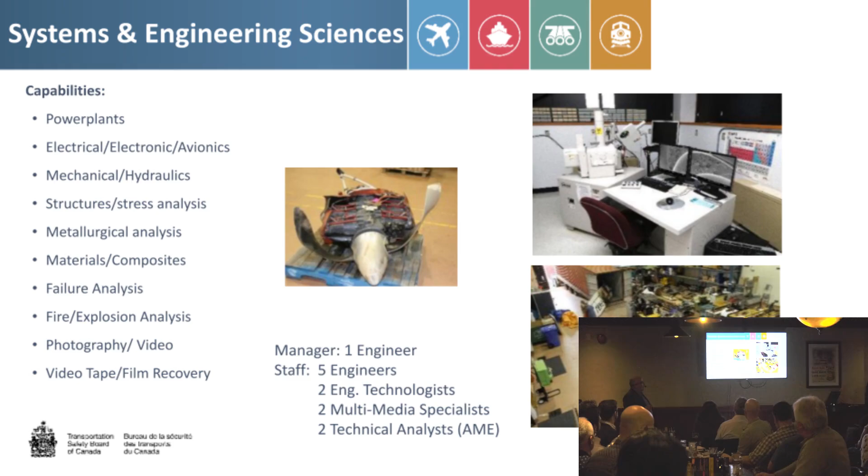Here's the Gucci engineering stuff. There's our lab, this is all you do. I'm not going to read the slide, but a whole bunch of smart folks there - about 6 engineers, 2 techs, media specialists, and a few AMEs. And they're the ones that really help us figure out kind of how stuff broke.

We also have recorders and vehicle performance. And again, remember, we're multimodal - some of our guys may have an aerospace or engineering degree, but they could be working a marine or rail occurrence as well. Matter of fact, our two strongest guys are both hardcore aeronautical engineers, and they ended up working on TSB's contribution to Titan, the submersible that imploded. They can help us, they really take the flight data that we have.

For example, this Mitsubishi was the Ile de la Madeleine crash with politician Monsieur Lapierre - I should know that, I was there. They were able to do a flight video of the occurrence. We had a lightboard recorder, wasn't crash worthy, but it survived. Gave us 2 hours of cockpit communication, so I knew exactly what was going on. We meshed it up with this, and it gave us an immediate understanding of what happened for that occurrence. So good work from those guys there.

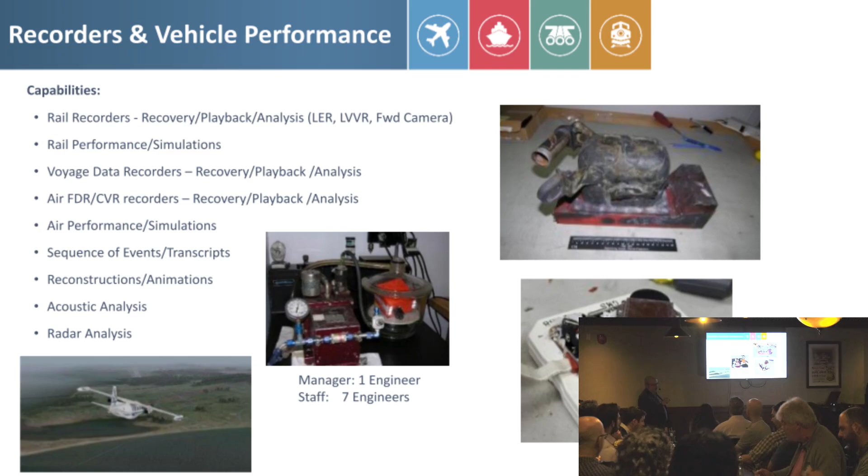So that's about the TSB. When Duff asked me - so there's a little disclaimer on the front slide that says I'm looking at 4 years of accident investigation - Duff asked me to see what can we do vertical-lift wise. So I said, okay, you want helicopter accidents? I can't really talk about accidents or investigations that are in progress, so if something happened in the last year or two, can't really talk, those investigations are still going. So I looked at 2020 to about last September, so about 4 years, 8 months.

I have about 40 occurrences, and they were split evenly. I had 13 that were really weather related - bad weather, they crashed. 13 that were pilot decision-making errors - slinging, dynamic rollover, poor flying, bad decision-making from the pilot. And then what I figured might interest this crowd more is the technical stuff, stuff that broke, where the pilot was basically just along for the ride.

So, all the information here, I'll present this next one.

It's a class 4, so it's very limited in scope, only 4 to 8 pages. There's a copy of the report if you want to have a gander at what an actual report looks like. These are the class 4s, and this is the class 3. It's got about 40 pages there.

That's the next occurrence. I'll read from my script so I don't mess anything up, because everything's taken from the report. So on 7 June 21, Helicopter Transport Services Delta Yankee Zulu, a Bell 214, was doing fire suppression with a water bucket and a long line.

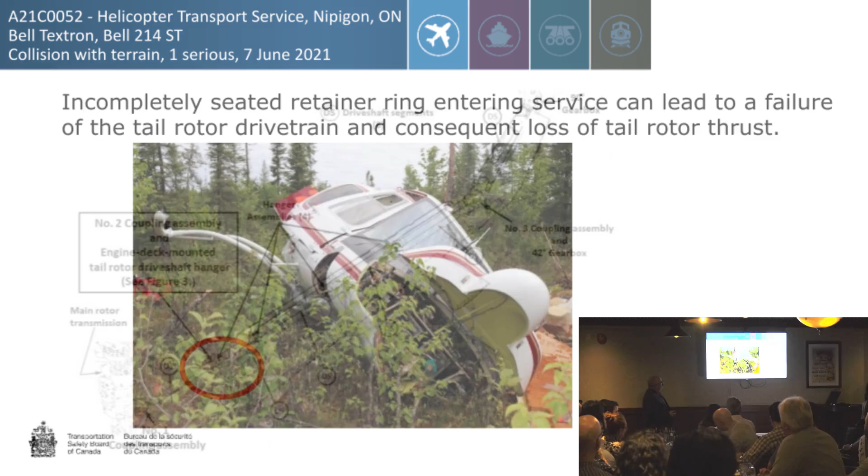So that's the tail rotor drive shaft. We all know, hopefully, there's a bunch of drive shaft segments - I don't have the pointer, it doesn't work - there's these hanger assemblies that hold them up, 1, 2, 3 couplings, and then there's 42 and 90 degree gearboxes that change the drive shaft direction to actually get to the tail rotor blades.

All of this was secured, and all this part aft was still intact, but this was loose here - that part there.

The first drive shaft segment, this guy here, exhibited rotational scoring as a result of flailing and contact with components in the fuselage. The number one coupling had remained intact. The remainder of the tail rotor drivetrain was contiguous from the crown gear coupling and number two coupling assembly to the tail rotor. So they looked at the number two coupling assembly.

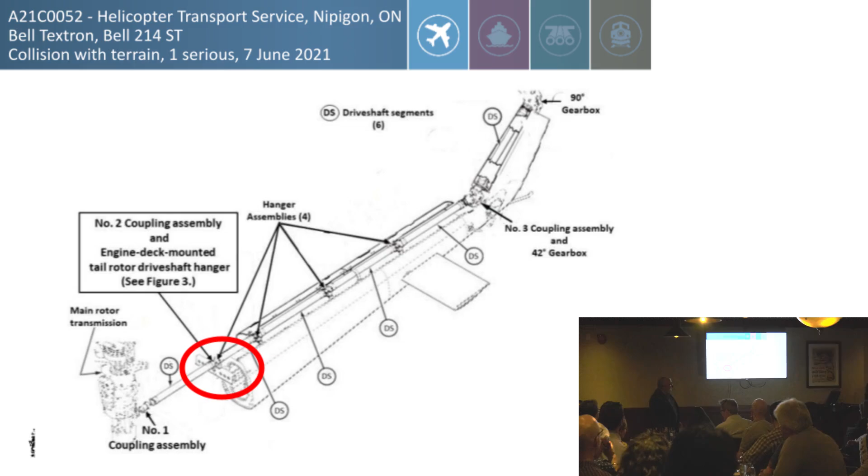In this case here, the forward flange of the spline coupling - no, that one there, number 15 - is bolted to the aft end of the first drive shaft segment from the last line. The spline coupling houses and meshes with the crown gear coupling, the next one over, which has an output shaft that extends through the seal holder, item 12, that one there.

A retainer ring, that bad boy, should normally secure the seal holder and crown gear coupling within the spline coupling. So this ring here secures this and this in here. Got me so far? I had to teach this to my kid to make sure I understood it.

So the retainer ring was found lying loose in the fuselage compartment at the crash site. The seal holder had exited the spline coupling and was loose on the shaft of the crown gear coupling. The retainer ring secures all that together, and the dimensions of everything - the groove is that wide, and the actual ring should be that thick - left a free space of about that much.

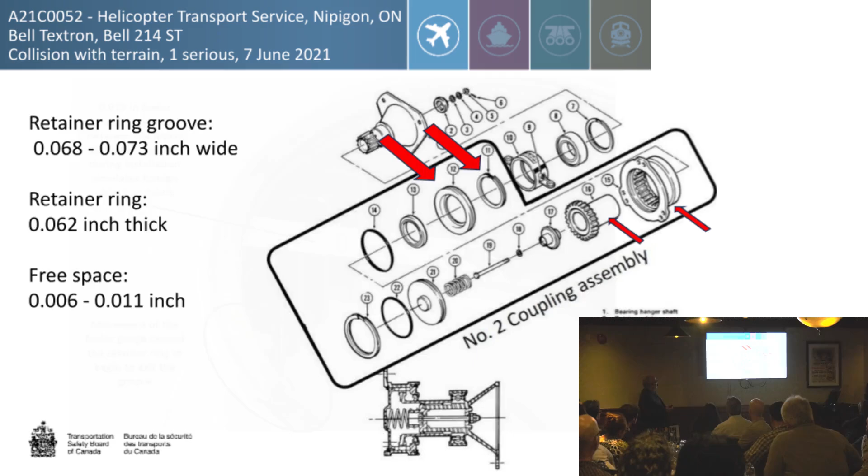So with the help of the lab or folks from the OEM, we get to these kinds of measurements and figure out that the retainer ring can either move or FOD can get in there and pop the retainer ring out. With the retainer ring out, everything comes loose.

The number two coupling assembly had undergone regular servicing in accordance with the Bell maintenance schedule. Several daily inspections had been carried out before the flight, but the daily inspection check sheet from the operator did not call for an independent inspection of this drive shaft coupling assembly.

The investigation concluded that for an undetermined reason, we couldn't determine if it was FOD, because it was class 4, we didn't go into the manufacture of the ring to see if it was manufactured properly. It's very limited in scope.

Subsequent movement of the main rotor transmission resulted in actual movement of the drive shaft, the seal holder, and ultimately the crown gear coupling exited the spline coupling, at which point the tail rotor drive shaft separated, which resulted in loss of tail rotor thrust, and consequently yaw control was lost.

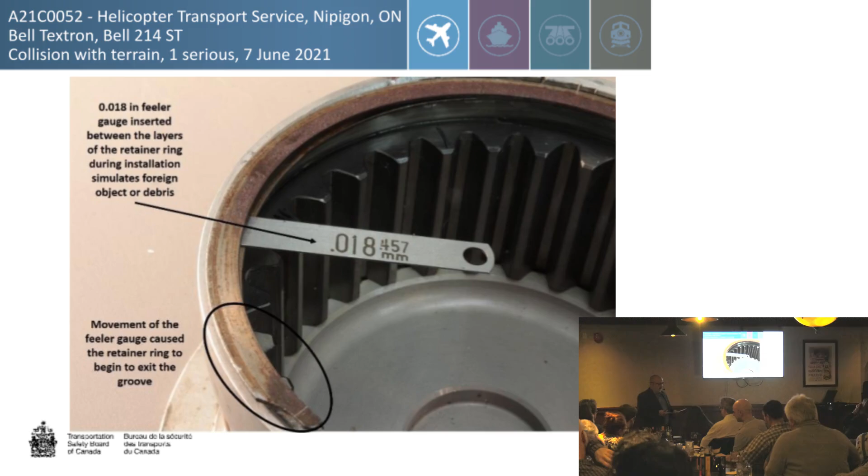The investigation noted that without the use of a visual aid, such as a mirror, verification, or with a measuring device, the inspection of the installed retainer ring is hampered by the proximity of the bearing hanger.

Because it's a class 4, we only produce safety messages, and they kind of come out something like this. We hope that the operator will take steps to address the issue. Again, because it's a class 4, limited in scope, we have limited teeth, I would say, to make changes.

So we push on either the operator or the OEMs to make changes. In this case, HTS grounded their fleet while the investigation was in progress. Their DI checklist was amended, and they produced a handout on their training course.

Because this affected loss of tail rotor and pilot flying abilities - I think because they slowed down a bit too slow, and then they lost the ability to properly auto-rotate - they had more training for maintaining airspeed during a tail rotor emergency, and their ground training was amended with more on loss of tail rotor effectiveness.

So that's a class 4. A class 3 is a bit more detailed, and now you guys are all investigators and are all going to deploy.

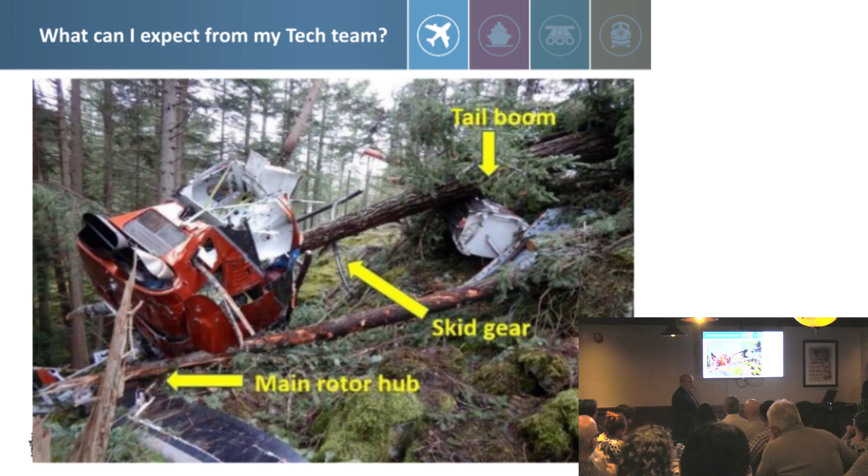The remainder of the fuselage and tail boom was largely intact, and the major components still installed in their normal positions. We have a vertical fin damaged by the tail rotor blades. We have a tail rotor drive shaft damaged by the main rotor, both at 15 inches, and a tail rotor drive shaft missing, again 15 inches from the aft of the tail rotor.

This damage is consistent with the main rotor blade striking the tail rotor drive shaft. Continuity among the engine, transmission, tail rotor assembly was all verified and all good to go. Rotor hub was found, main rotor blades were still attached.

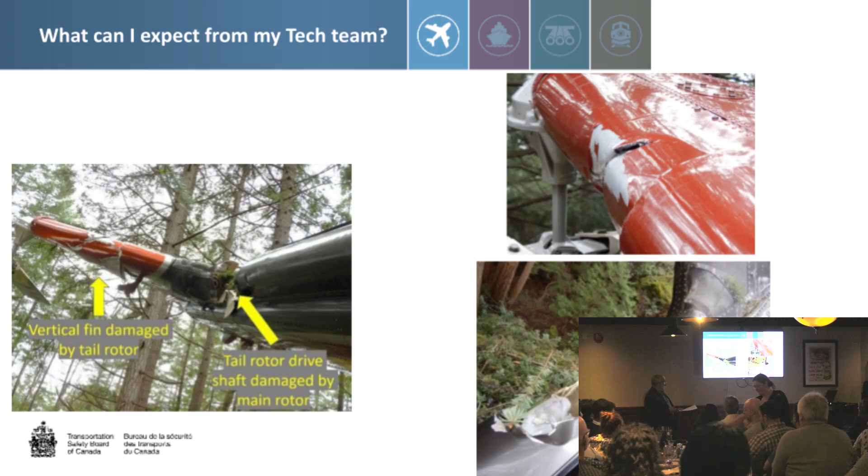And I'm kind of speeding up because I've got a minute left. So this is the stuff we're measuring. We're trying to figure out what was turning, what was not turning, what hit what. Okay? And then we'll bring pieces back to the lab and measure. And here in this case, we'll find that we have indents on the mast from the stops.

So we have damage on one side, and on the 180 degrees of the other side we have more damage, indicating mast bump or rotor flapping in a low-G condition. And we have the fuel in the off position, but that switch is broken, so we don't know how it got there.

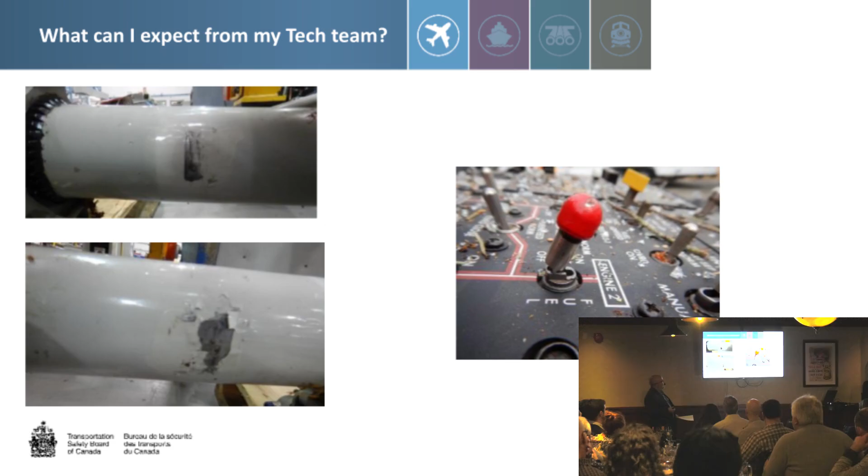Also, my ops team worked on weather, operational procedures, flight analysis, GPS, flight data, all that stuff. And they figured out that the weather was bad at the time they were flying. As a result of our sequence of events, the information we get from our technicians on the aircraft, and the information from the ops team and interviews with the pilots, we decided to look at these factors in the investigation.

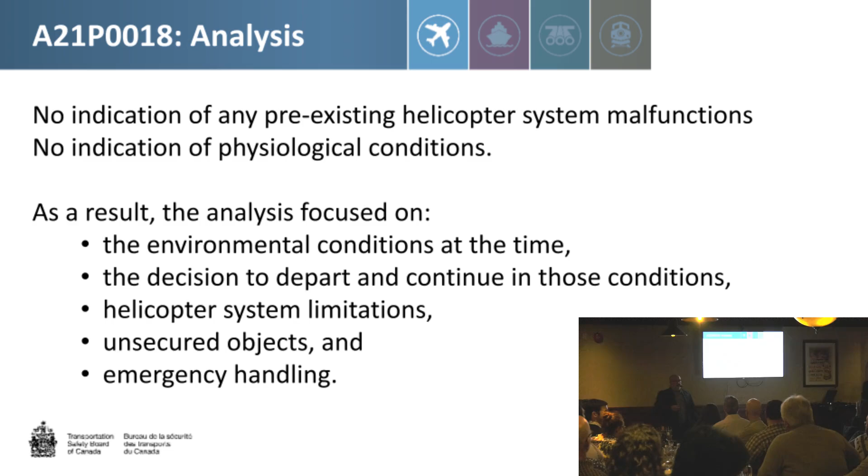It basically gives us this kind of text here. So at 9:46 p.m., during the cruise portion of the flight, the helicopter entered wind shear and experienced a sudden dramatic right roll and nose-down pitch, while traveling at a ground speed of 73 knots on a track of approximately 110.

The helicopter violently pitched nose down and began a rapid right roll. The cyclic was momentarily pulled from the second pilot's hand due to the aircraft's violent, rapid movement. The helicopter rolled close to inverted.

During this loss of control, the PIC joined the second pilot on the controls to attempt a recovery. They applied max aft cyclic in the recovery attempt. During this period, the helicopter fell approximately 1,400 feet, to an altitude of about 1,000 feet over the ground.

At a descent rate of 8,220 feet per minute. I'm on my last page.

After regaining control, the number 2 engine experienced an uncommanded in-flight shutdown, and the flight controls became very hard to manipulate. I think the hydraulics went, because I think this type of helicopter is not meant to go inverted.

During the descent, there was rapid rotation to the right. The pilots were unable to arrest the descent, and after several rotations, the aircraft collided with trees and came to rest, as we saw it.

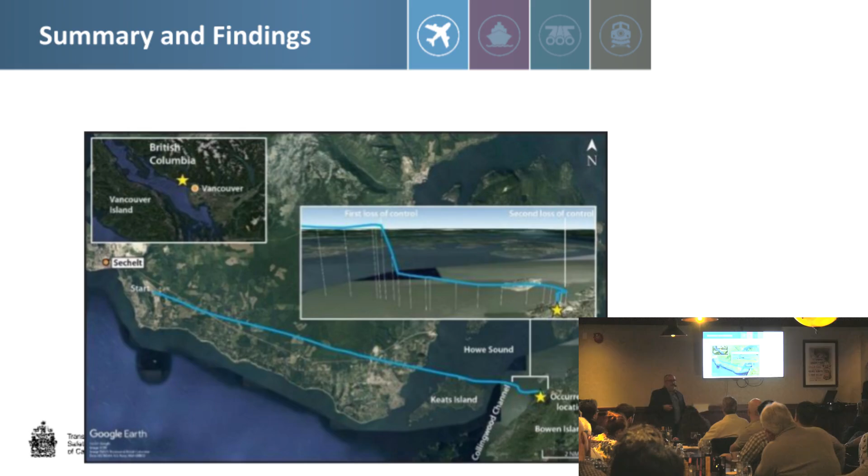So that's the type of fact-finding statements we're looking for, and then we end up pushing out findings such as this. This is one of the findings, causal and contributory.

As a result, the main rotor blades contacted and severed the tail rotor drive shaft.

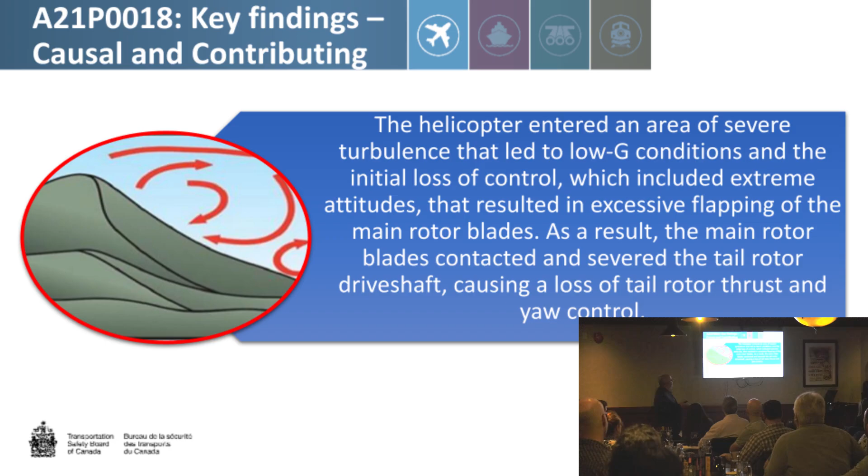Another one: the number 2 engine shut down, which reduced fuel flow and then reduced main rotor speed, and then yaw control was lost.

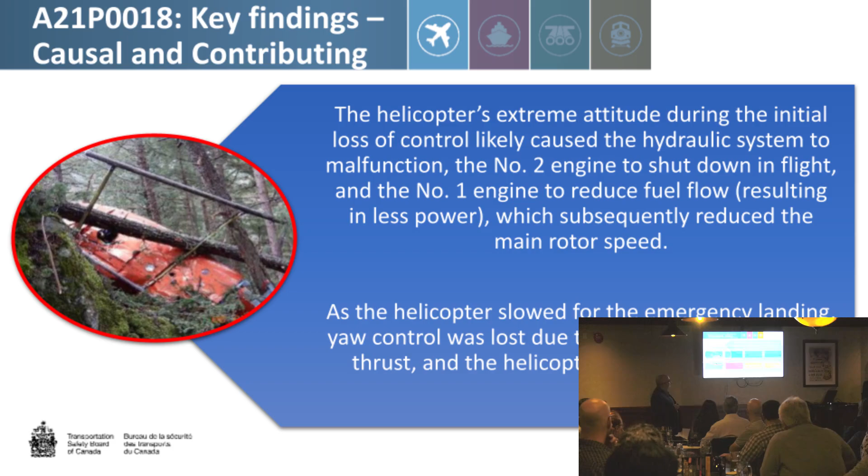That's about it for accident investigation. This is the sales pitch on the TSB. We have key issues that we're looking at across the transportation industry.

Those in blue are the air ones. We've got safety and fatigue management in that, which applies to everyone, as well as regulatory surveillance, commercial fishing safety for the marine side, and then a few rail ones as well.

We have a SECURITAS program. I think there are a few flyers around the scene. That's a confidential reporting system. If you see anything unsafe in the aviation industry, or in the operation of aircraft or the fixing of aircraft, you can give us a call there, send us an email, completely confidential, and we talk with respective agents at Transport Canada to try and find a way to identify the issue and bring it forward.

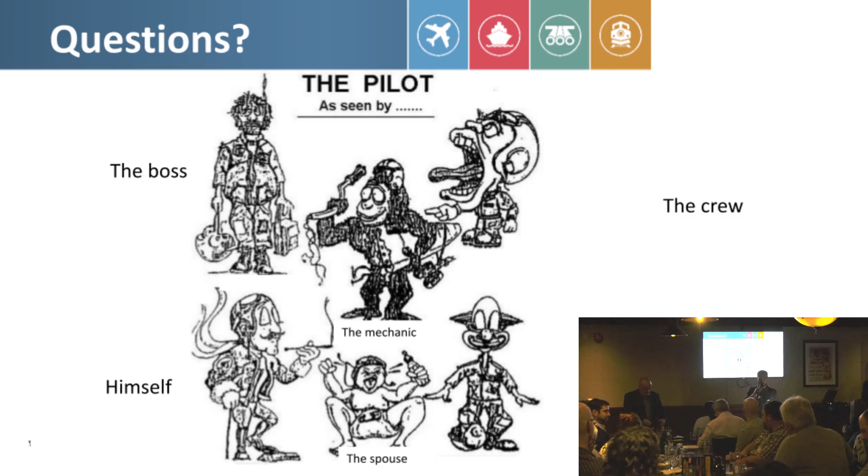All right, okay, so in our first part of the presentation, we had the government and regulation side, their angle, their perspective on the topic. So right now we're going to have one of the other side, the other angle. We're going to go into the industry. We're going to have Benoit from Bell. He's going to be talking again on flight safety, and again, this time with more of the OEM angle.

Benoit is the Principal Flight Safety Officer and Air Safety Investigator at Bell Textron Canada in Mirabel. He's been with the company for a long time, and has 34 years of experience in aerospace and commercial aviation. He currently oversees all of Bell Textron Canada's aviation safety, including the safety management system, aircraft emergency plan coordination, and all accident investigations. Previously, he was BTCL's quality manager, and also worked at Bombardier Aerospace as a quality assurance coordinator, and was minister's delegate for the CRJ 700 and 900 jets. Benoit began his career as an aircraft maintenance engineer and pilot, and was president of the Quebec AME Symposium for 5 years. He holds a certificate in administration from UQO and is a certified aircraft maintenance specialist from ENA as well. So please welcome Benoit.

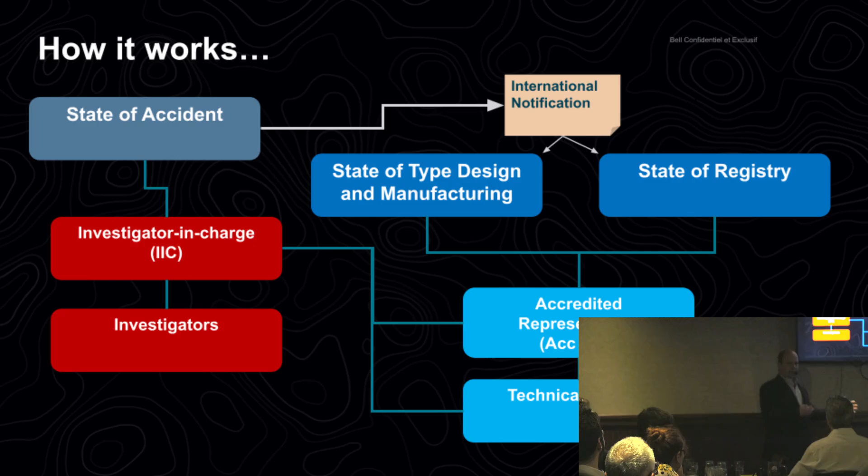So it's the NTSB as an ACREP, and we support the NTSB as well. Okay, there's 3 ways we can help the authorities investigate their accident.

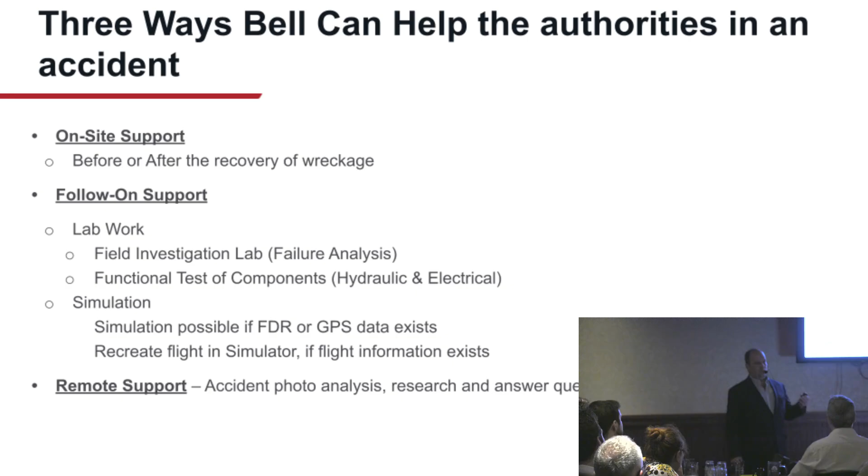We can go on site either before removal or after removal of the wreckage. We can also do follow-on work with lab reconstruction investigations. We do have a Bell Field Investigation Lab in Fort Worth, Texas. We also have various labs at Bell.

We can help investigate, do functional testing. We can do simulation, recreation. If we have the data, we can reproduce an accident. We can do simulation as a video and stuff like that. And also we can do some remote support, like we need a flight manual, a maintenance manual, so we can provide the information, or system engineering will come in and provide an opinion on what he's seeing with the accident.

So we have a couple of capabilities other than the support in field or in the lab. We can do failure analysis, crack growth analysis, dimensional inspections. We have all the system specialists at Bell that can support all technical publications from TechPubs. We have also other engineering reports when we tested components originally. We have all the manufacturing data to support the product.

It could be from a supplier point of view as well, so we can provide, or we can get that information. We do also acoustical analysis, simulation, so recreation as well. So we have a copter simulation with data. We can reproduce the flight. We'll see that in a minute. And also we do some non-destructive testing, destructive testing, or avionics.

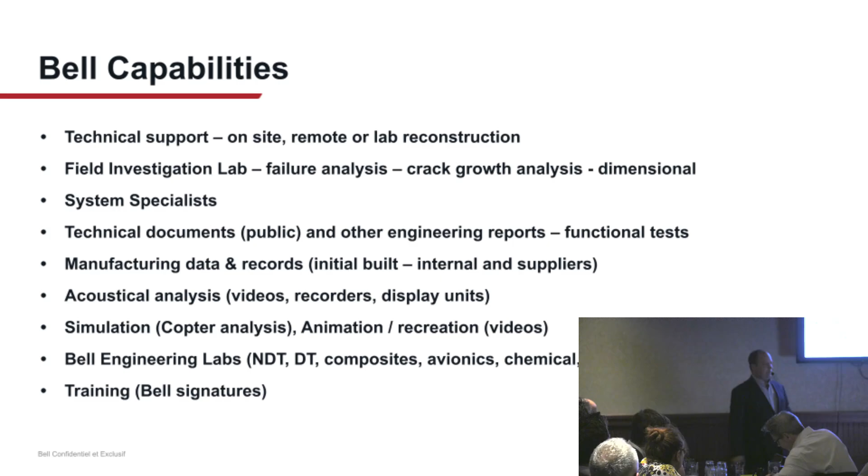So this is an idea of our copter simulation. It's not like a full flight simulator. We have that also, but we can recreate the current representation of what the aircraft did, and then we can come up with some results. This would be like main rotor tip blade fluctuations. So depending on the movement of the pitch of the aircraft, it will induce something else.

So we have that. We also do spectrograms. So we know our frequencies. This is proprietary data. I need a beer.

But we can tell from the spectrogram that this aircraft was actually in ground idle at the beginning, then spools up, there's a flight. So if there's one frequency that disappears from radar here, we can tell exactly what system or what failed in that process. Sometimes we have one or two different frequencies for like a tail rotor or a main rotor or something like that. So we can tell right away this frequency starts missing at that moment in time. So we can reproduce that.

And that can actually come from a camera or a CVR. We're not allowed to listen to a CVR, but if they can segregate the voice from the noise, we can get the noise portion and do some simulation or analysis.

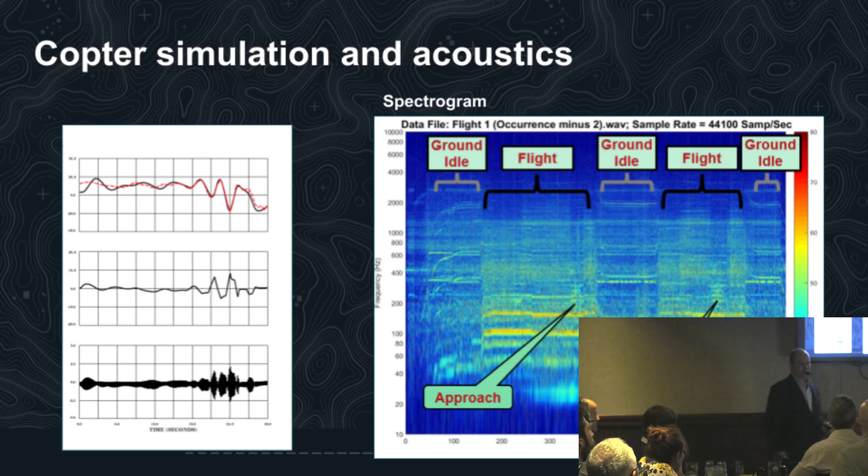And often we're not talking to pilots or witnesses. Normally this is the TSB doing that. Bell is actually supporting the technical portion, so we're not there to determine a cause, we remain factual on the aircraft. TSB will provide the cause and the recommendations as well. So we have a direct email, flight safety at bellflight.com, or a phone line 24 hours where we can support the authorities. We're not there to support a private operator.

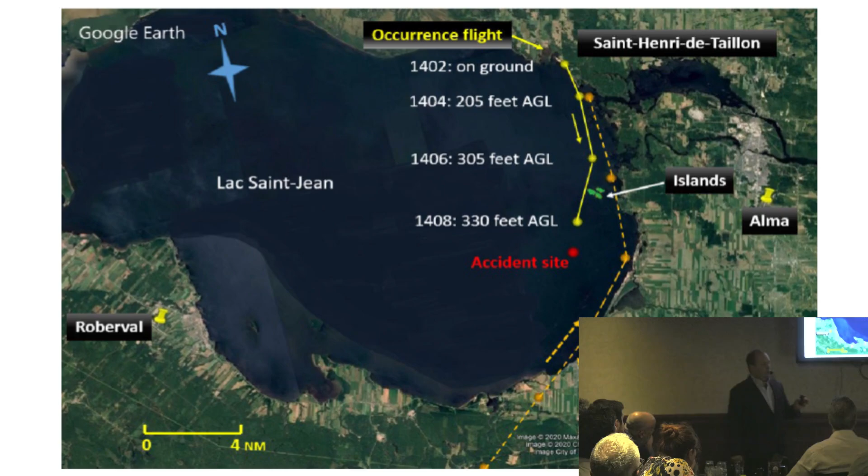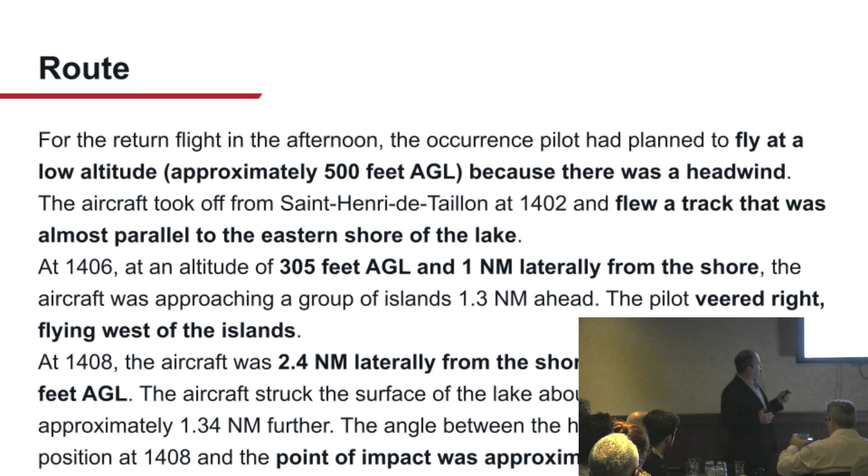This is the impact site for the accident, kind of important in the report section. For the return flight also, the pilot was supposed to fly low, like 500 feet. There was also a headwind component, so needed to stay low, and also went offshore after that.

So on board there were 2 altimeters on the aircraft. One was a radar altimeter, the other a conventional altimeter. The second one is mandatory, but the first one is optional. In this case, the radar altimeter has a little select bug, so you can select a minimum altitude if you want.

For IFR approaches, when you come down, you have to be out of the clouds by a certain altitude. If you're not, you have to overshoot. But the Service Aérien Gouvernemental had procedures, so you need to select the bug if you're en route, to about 100 feet - that's your minimum altitude. If you're over a lake, 50 feet. In this case, it could have been 50 feet, but at least you have a light and a warning that you're at that altitude at that moment.

And the other is a conventional altimeter. The altimeter was set to 30.13 inches of mercury for atmospheric pressure, but the current pressure in Alma, right next to the airport, next to the accident site, was about 30.08. Seems minor, but that 0.05, when you're low, is about a 50 feet overestimation of your altitude. So this was not used - the radar altitude bug was at 0, and this altimeter was set a little high.

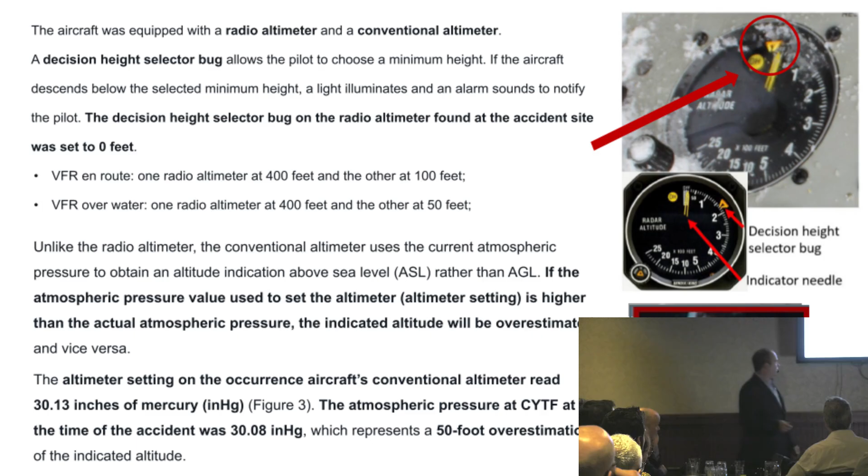As far as weather, it was VFR. If you know, VFR means visual flight rules, so it means you can visually see your surroundings. IFR means instrument flight rules.

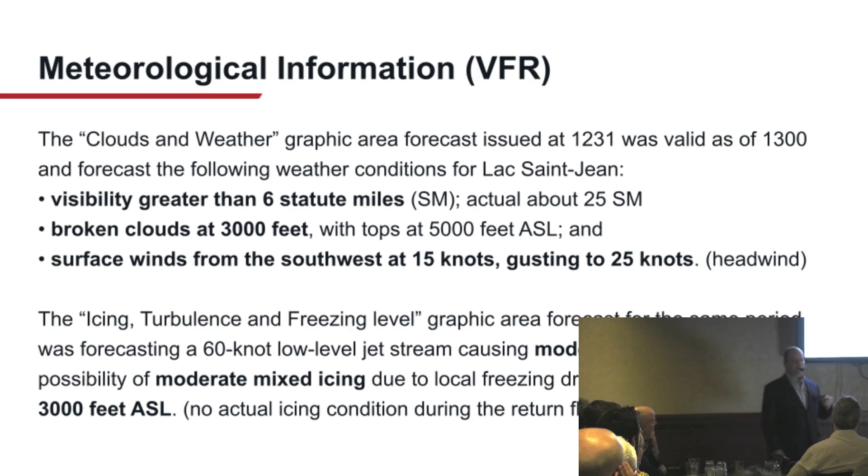The weather, our visibility was 25 miles. The temperature was good. There were broken clouds at 3,000 feet. And the winds, there was a headwind of 15 knots gusting 25, slowing down the aircraft a little bit. There was some freezing temperature called, but nothing encountered during the return flight.

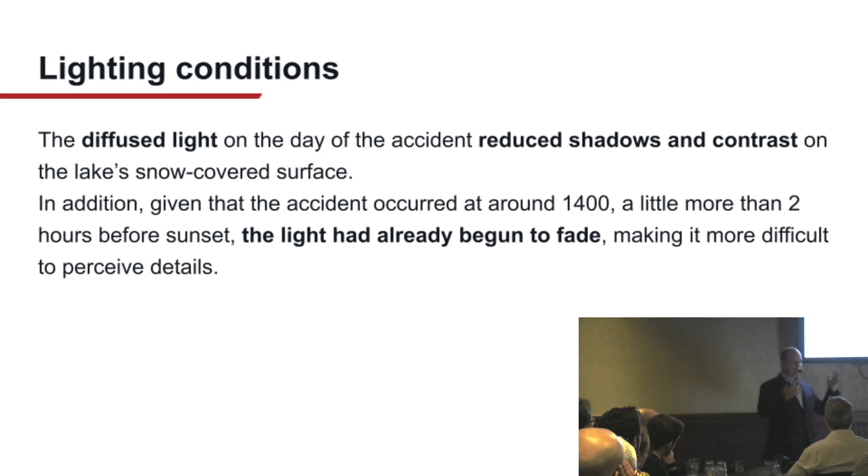Lighting conditions - we're going to talk a bit about diffuse lighting or flat light, same thing. It's when it reduces shadows and contrast when you look at an area. Since the light was fading a little bit, we'll see a picture.

Some people would confuse that with the whiteout. The whiteout is when you're engulfed in a glow. If you're landing, approaching a lake with light snow, and with the clouds and the lake and the snow around you, or blowing snow while en route, then you can just lose complete visibility.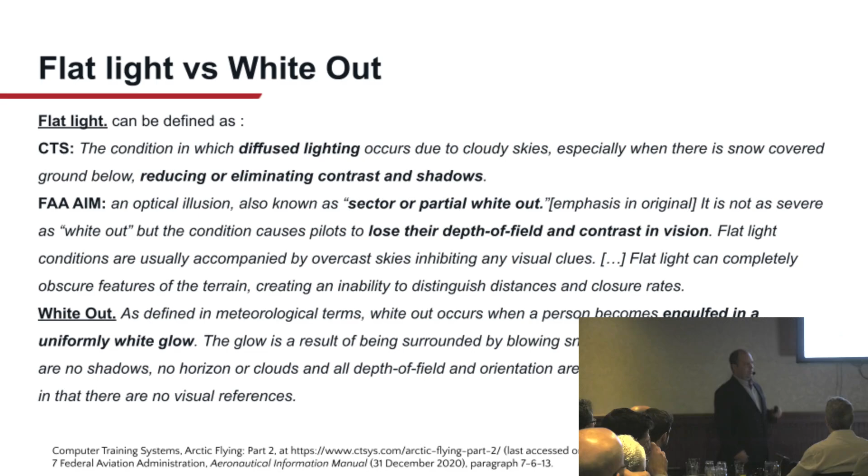The next picture will show you a bit the difference with what the pilot did. There's two spots on the map here that the TSB took in the simulation. This was the actual position of the aircraft, about 2.4 miles from shore. This is what you see when you're at 300 feet, or 330 feet where the pilot was. And this is the same view at 50 feet - not much difference, right? It's exactly the same view.

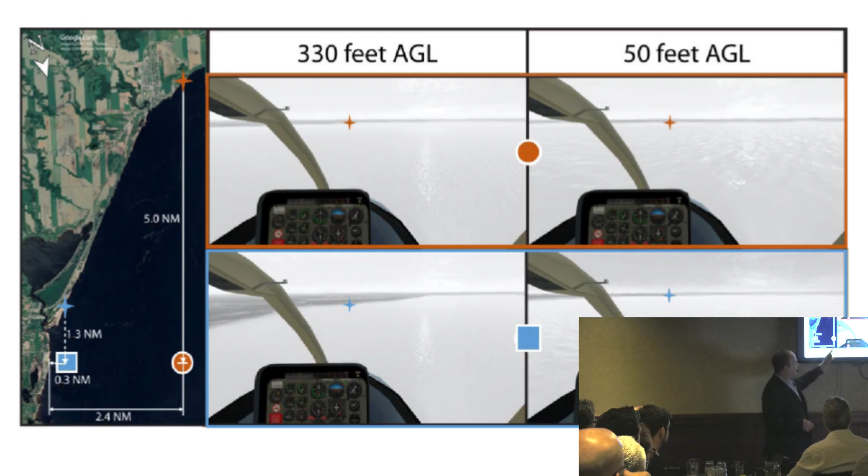So it's difficult to see the difference with the flat light. The next one below is 0.3 nautical miles from shore. Flying at 300 feet, you can see the shore - you have a good reference on the side view. Once you're at 50 feet, then it's pretty much the same. So you don't know you're flying low in those conditions.

There are some warnings issued by the FAA and other authorities: when you have this, even when visual reference seems to be good, it might not be safe to fly, and your depth perception is poor. Also check your altimeter, do not descend below a certain point. You have to stick to the references you have in the cockpit.

Now, the aircraft speaks to us, and I'm not crazy here. You have to look for evidence on the aircraft, and often when people start investigating or are on site, they get two parts, look at the parts, and say 'oh, we'll see how these parts fit together,' and start banging parts together. Then you lose some of the evidence from these parts when you do that. So we shall never touch parts together. You can look at them, you can position them like that, but never make contact between parts, because you might lose some good critical information.

In the couple of images that will follow, we have a couple of Bell signatures - they are specific sometimes to the Bell 206L4. You can have a different fracture if you're on another model, like the 206 JetRanger would be totally different. But you gain that with experience.

So this is the drone view of the accident, came again from the TSB. We have some impact marks on the top right corner.

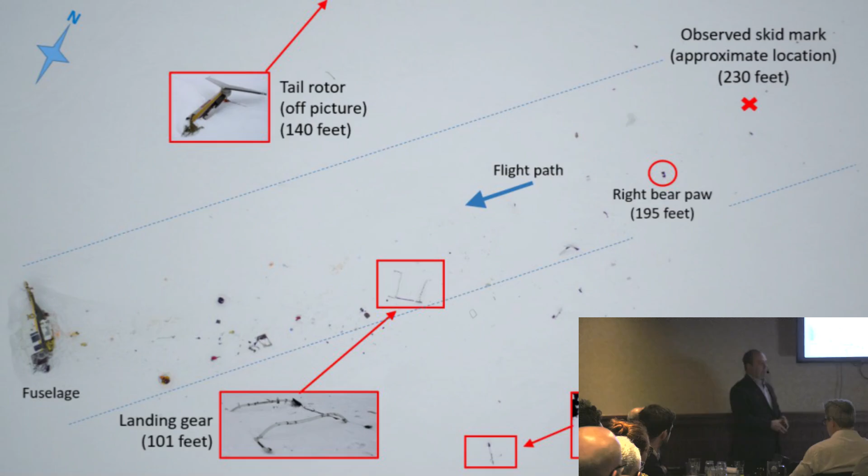So we can tell there was a good horizontal velocity on that aircraft. If it would have been a vertical impact, all the parts would be just scattered around the aircraft. Depending on the velocity, it might be a little wider, but it would be all concentrated. But in this case, it's all spread out. So we understand it was a high horizontal velocity and a shallow angle when the aircraft hit the ground.

So that's typical of what they call a CFIT, or controlled flight into terrain. So the pilot never noticed he was coming down. It was 300 feet, he came down, and a few minutes later he was on the ground.

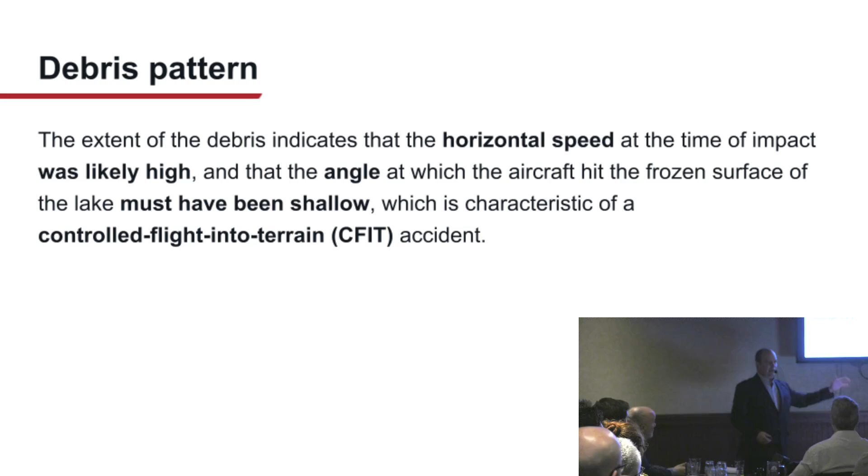Now the airframe. Thank you to designers and engineers for your help here. So what we want in an aircraft is to save everybody's life as much as possible, the crew and passengers. So the airframe is so robust that it will take some of the kinetic energy during an accident and transfer that to mechanical energy. We want that energy spread around the aircraft, so there will be fracture, there will be stuff that breaks, but that's what we want. We want to save someone's life in there.

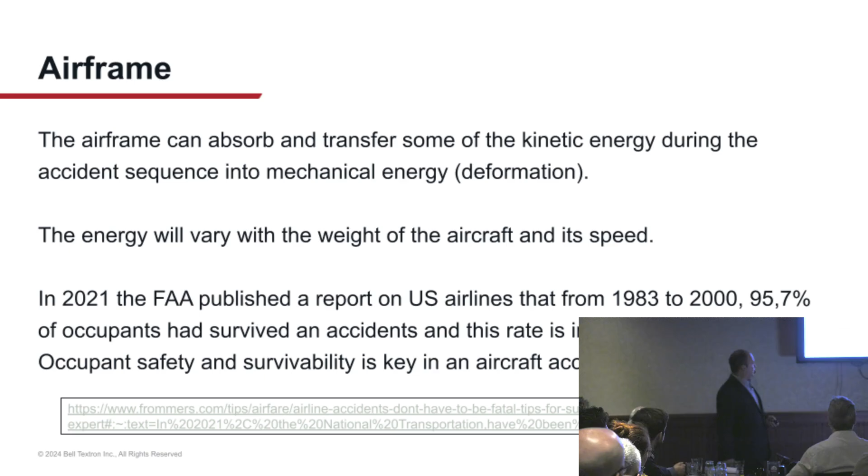Also, from a stats point of view, the FAA said from 1983 to 2000 there were about 96% of accidents that were survivable, non-fatal, and this rate is also increasing, improving, which is key in that.

So this is the aircraft. First, the cockpit. We completely lost the nose of the aircraft, so we had to cut some wires. It was hanging in front, but with the impact, the nose took off. This is the cargo compartment here. There's a lot of big fractures in there, so that energy started spreading within the aircraft.

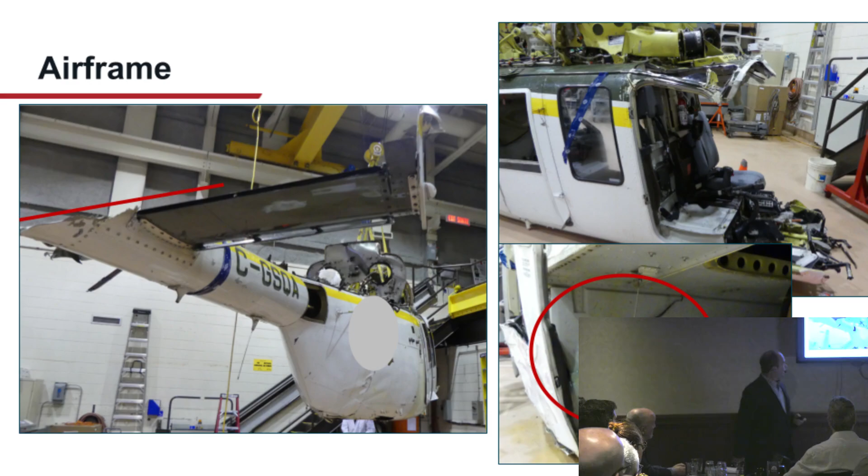And the tail, we look at this funny angle here with the tail boom. So the main rotor actually struck the tail boom while rotating, so it cut the tail. This is the belly of the aircraft. Again, a couple of bumps in the belly, which brings the impact and the energy within the aircraft.

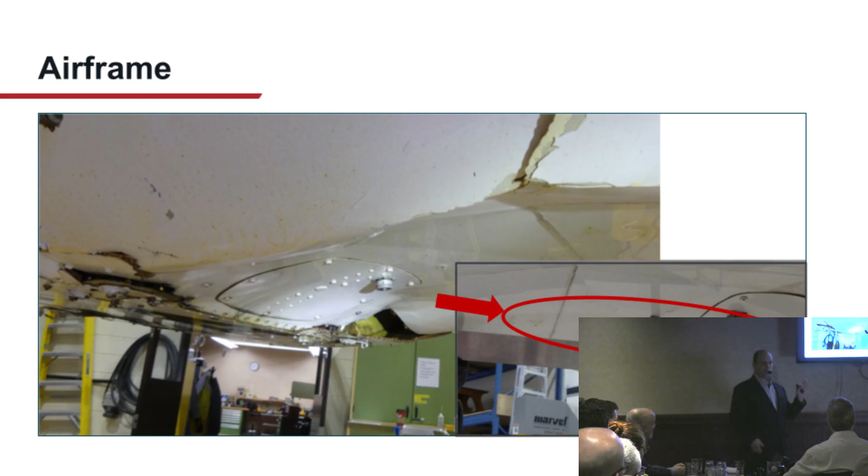This is a ruler that we put across here. So there was about 2.5 inches of bump within the belly, which is not the worst I've seen, but worse than that exists too. Again, the energy - the pilot seat has a web here made of thin aluminum. It's made to compress when we have an accident, so we can save the pilot's butt as much as possible, so we can see that deformation, though that's designed for that.

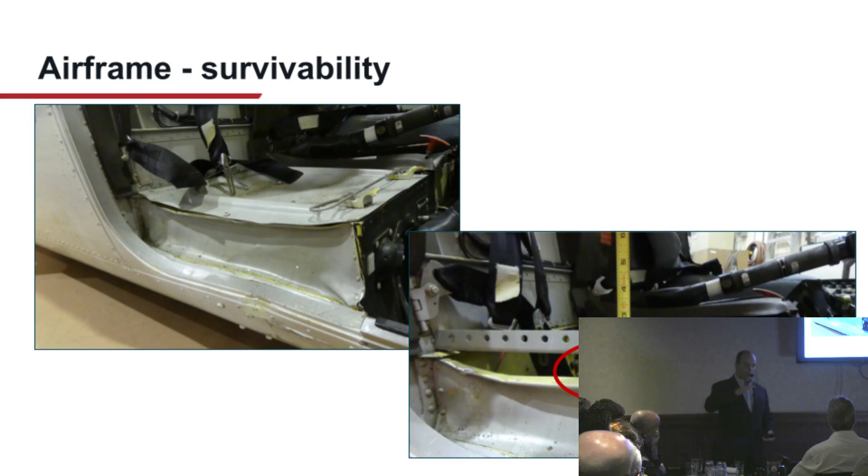Sometimes you have seats with shocks or springs that can reduce the impact as well. The more you compress the seat, the more forces are required. But that's also part of survivability.

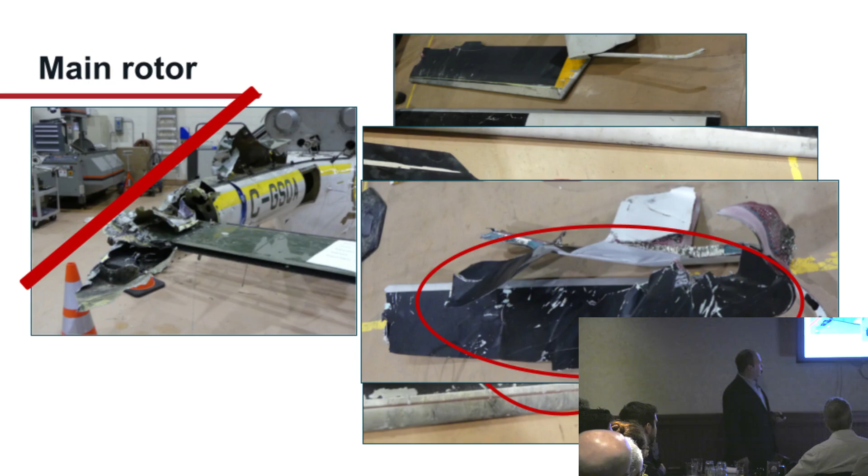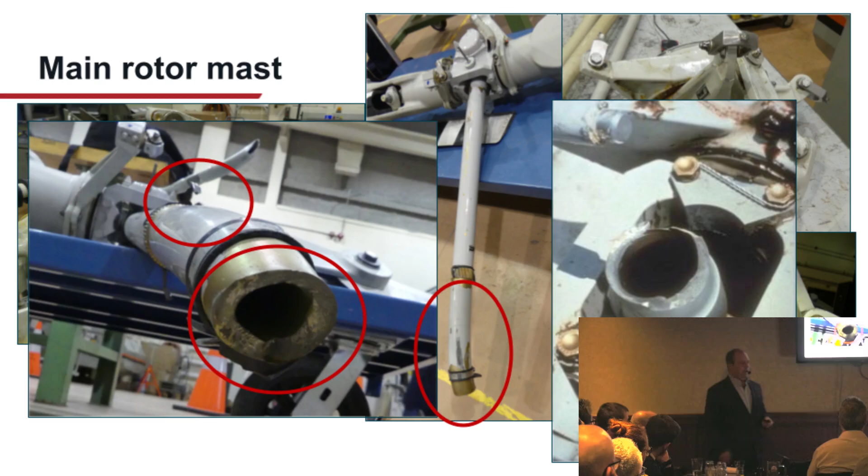Again, base of the mast. We see the angle, about a 45-degree angle. We can look at if there was some fatigue, but this is obvious that's an overload, not fatigue. So we'll see a different striation within the fracture. And this is a 206B Jet Ranger. So this is the main rotor hub, reversed, and this is the impact. Same on the 204, 205, 212s. You'll get the same thing here, same signature, same area. Typical for Bell. So you gain that with experience.

You talked about mast bumping earlier with the 212, so these hub stops will contact when there's high flapping of the main rotor in flight. We have some flap restraint when the rotor is not turning, or very, very slow, or not turning at all, that will stop the main rotor. The stops here will not contact, but when you're in flight and it's spinning fast, the flap restraint will go away and then you can come in contact when there's an event like that.

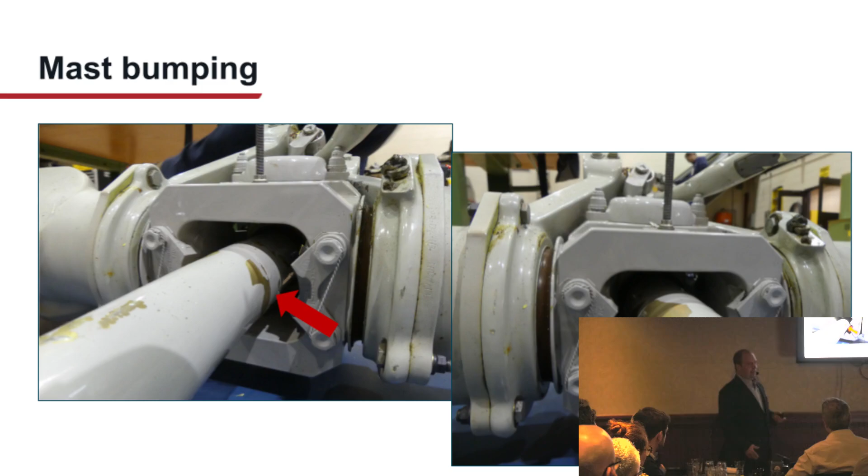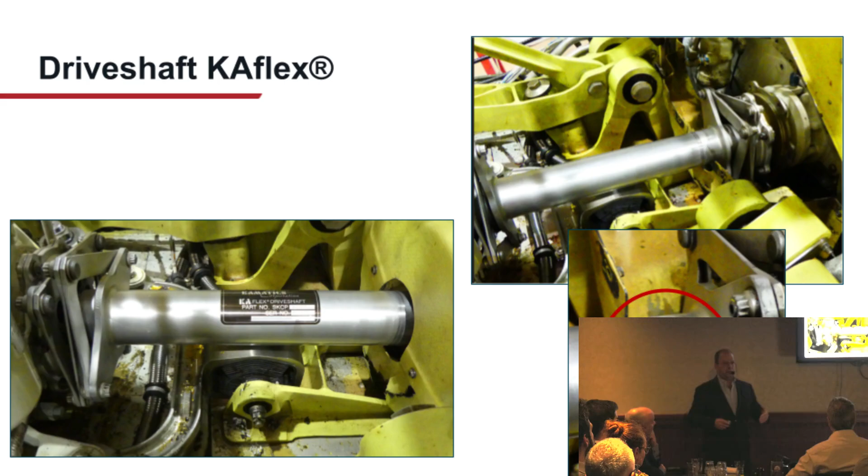Did I skip? Sorry, okay.

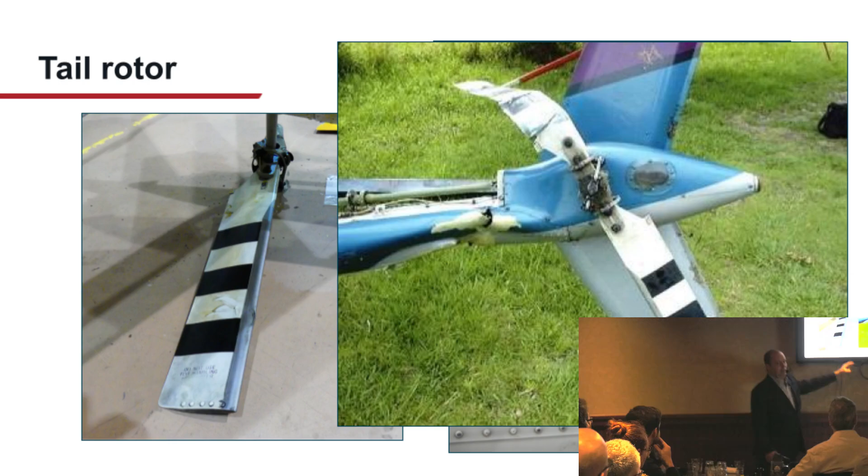Tail rotor, again, we look at these blades. They're not deformed. There's a bit of a fracture here, but basically the two tail rotor blades are almost intact, so no deformation. There was a contact between the blade and the tail boom, so it was obvious because the mark matched the blade exactly. But if I look at a blade that impacted the ground with power, it'll look more like that - typical of impact blades that had power. This will look different than a straight blade like this, with big deformation and crushing.

That's my favorite - we call it the cigarette test, not very popular these days with the new stuff. What we do here is simulate a drive shaft by rolling a cigarette or a piece of paper like that, and take it around. In that case, the sense of rotation would be clockwise, like that. So if I stop the tail rotor from turning and turn my piece of paper, I'll get something exactly like that on the picture.

That tells me the tail rotor stopped before the main rotor. If I do the opposite and my tail rotor is still spinning, I'll get exactly the opposite, and then I can tell that the main rotor stopped before the tail rotor. This is also very simple if you want to try it - I've got a couple pieces of paper here. But again, it's an easy way to find out. So the aircraft speaks to us - just take a look, do the cigarette test, and we took a picture of that. Maryse was there with me as well when we did the investigation. But yeah, that's what we do.

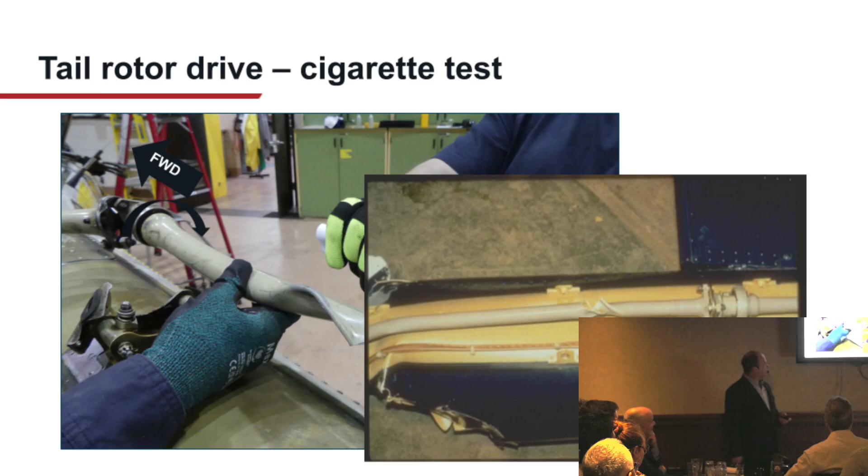Another occurrence like that, we see the twist on the tail rotor is a lot worse, but we can tell whichever came first. Flight controls, again, typical fractures on the pitch links.

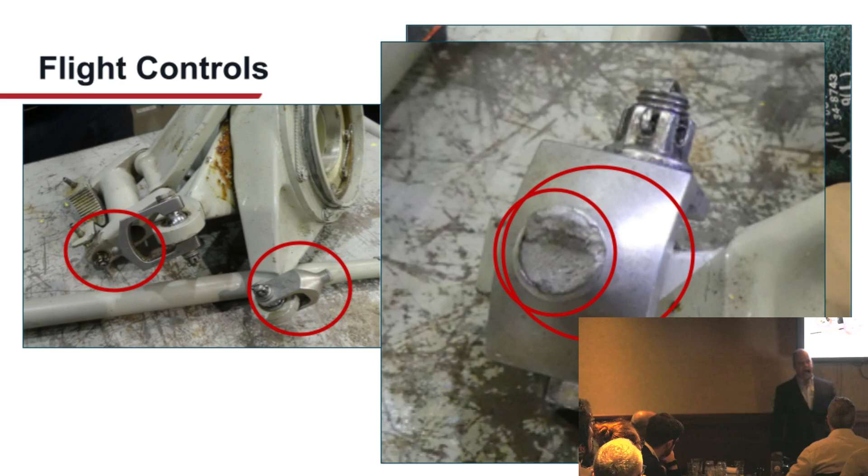When there's an overload, they will fracture at the base of the threads, or sometimes on the 206 Jet Ranger, there's a little shoulder on the pitch link that will fracture on top of the threads. So this is where the fracture will occur during an overload sequence - typical, we see that very often. Sometimes we see a pitch link that will fracture in the middle, or it's twisted like 180 degrees. And I saw one in front that was connected, but was actually 180 degrees to its normal position. So yes, that happens, and we see the rod bent a little bit, the threads on the fork end - typical of an overload.

Skid gear also speaks a lot. If we look at the skid gear, there's a little bit of a shallow bump in the forward cross tube, meaning there was some impact with the ground on that skid gear. We can take the measurement between the two skids and confirm the spread of the gear, to see if the impact was hard or not. In this case, we had just over a 2 inch difference.

Meaning the vertical impact on the skid gear was not that high compared to a real vertical impact. This is a skid gear that had a high velocity vertical impact - the skid gear is spread. I've seen some skid gear spread way up here, and they will fracture, of course, near the saddles here, like here. But we see this is also typical of the accident sequence. We understand that.

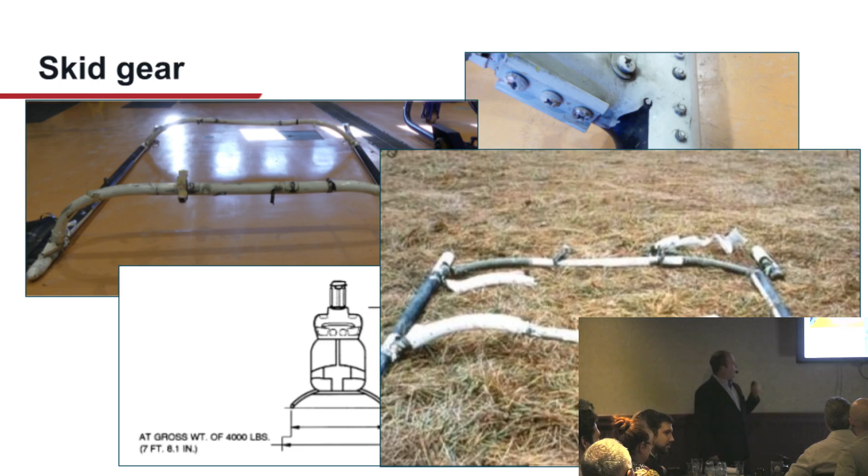Other fractures that we're seeing on the skid gear.

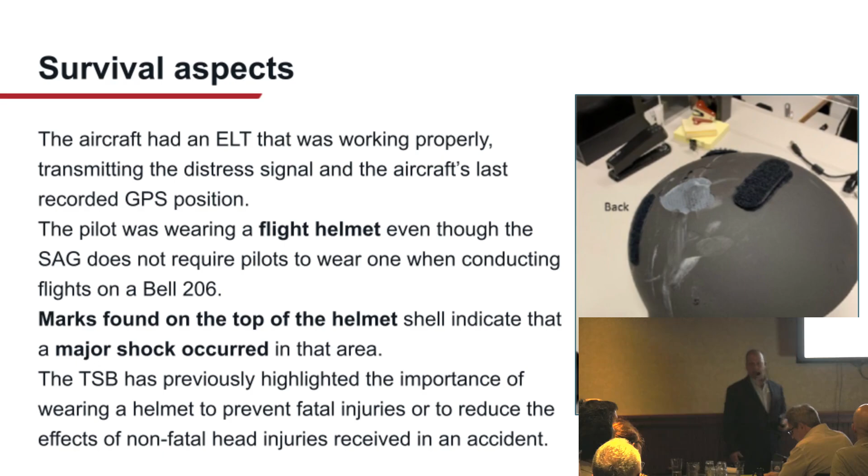Now, helmets. Some pilots fly commercially with helmets, which is a good thing. If you look at this helmet, there was a major impact to the back of the pilot's head that probably saved his life in that accident. Otherwise he would have been unconscious, or it would have been fatal. This helmet saved this pilot's life. Although it's not required in their procedure for SAG, this pilot was wearing a helmet anyway, and we do that as well with Bell on the production line. We wear helmets for our flights, so if something happens, it can really change your life, or change everybody else's life around you as well. The TSB highlighted the importance of that; that was one of the recommendations from the report.

In conclusion on that accident, even though visibility was great at 25 nautical miles, the flat light was changing the pilot's perception. He was not able to recognize that, although he had some training on it, and that training was not sufficient to eliminate the risk of the accident, because it occurred. It was impossible for him to see the shoreline at that point; it was too far out. There was also no indication of any pre-existing mechanical damage on the aircraft during the lab inspection. It was really an unexpected descent that resulted in a CFIT accident, controlled flight into terrain. Luckily the pilot survived.

We also did a safety stand down with our pilots at Bell discussing this event, and we look at human factors in an accident. One that stands out is what they call 'get-home-itis' in English. You really want to get home. It was 2 o'clock, the light was down about 4 o'clock, and he had to be in St. Hubert, so he was on a timer to get home. Sometimes the decision varies depending on circumstances. If you had all day to fly, you'd probably go along the lake shore, which would be good. But in that case, sometimes you take a decision because you're rushed and want to get home. Even if it's dark, you say, 'I'm just going to continue, I'm only 15 minutes away.' That could change your life.

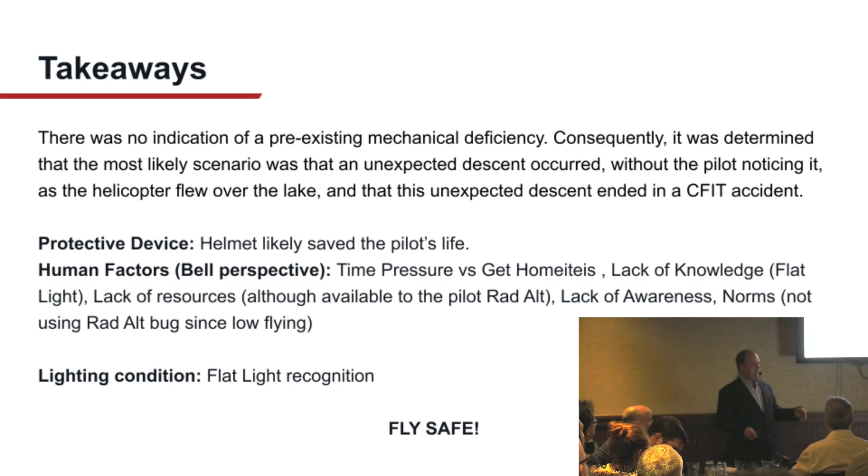It's also a lack of knowledge on flat light resources. He had a radar altimeter he could use, but didn't use it. There was a lack of awareness of the situation. Norms also played a role; he wasn't using the radar altimeter all the time because they were often flying low around the terrain, but it would have been good to use it. And the lighting condition. So, I'm done.

Any questions? Sure, you do have one.

Thank you, Benoit. Thank you.

So first question. We saw in GP's presentation that when they investigate, they come out with a report and have multiple recommendations. Sometimes some of them apply to the OEM, so that's one way the OEM can help make flight safer. You also showed that by design, we can make aircraft safer, for example, by design you can absorb shocks. Is there any other way the OEM can make flying safer?

Sure. When we learn from accidents, this is the intent behind all the recommendations made by the TSB. But even in the course of an accident, if we find something that seems wrong, we'll take action immediately so we can get our engineers working on a solution. We provide a service bulletin that will correct the fleet. I've seen issues like a 505 in California where the collective stick fractured. During the weekend we did the alert service bulletin and the AD with Transport Canada, and it was issued on Monday. Everybody had it. So this is a quick answer to an event that occurred in the US. We do take actions when we feel there's a safety issue, and we connect and provide a resolution for it.